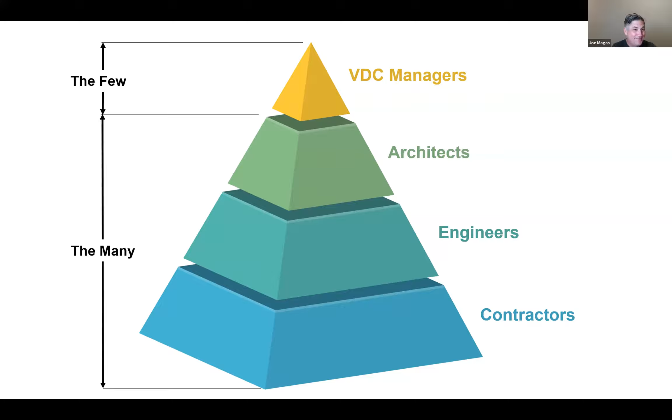And the problem with this pyramid, that model checking is only serving the needs of the few, is that if you reverse the pyramid, and I really want your thoughts on this, Jason, what we have is concentrated risk hinging on a few people, the VDC managers. And yet the rewards to everyone else are sort of unrealized. What's your thoughts on this, Jason?

Yeah, I think with such a small group of people on the project traditionally running the model checking, that's a lot of risk, a lot of work on a smaller group of people. And meanwhile, there's designers, architects, engineers, and of course all the different contractors that really have a stake in it and should bear some of that risk. And so they too can be looking over their models, their designs, their constructability. So that's the shift that we're seeing. Right.

We want the risk to the few to be the rewards of the many, and that trend is happening in the industry. For example, I had a discussion the other day with a mechanical engineer. Now he works in a facility management or project management role in a municipality, but this sums up what people feel: I don't see the value of a 3D model. I just use PDF. So that's what he told me initially.

So that sounds kind of negative. He says, except I think a 3D of the mechanical room would be helpful. So while this engineer was trying to tell me he didn't see the need for model review, he actually was confirming my basic premise. He doesn't need to review the whole model, but to review the part that affects him is beneficial.

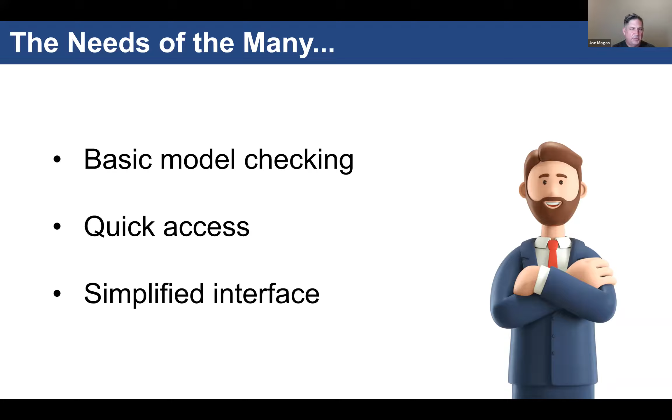So when we drill down, when we go to how does Solibri serve the needs of the many? Well, what do the many need? That individual I talked about, that engineer, he wants basic model checking, quick access, a simplified interface. That engineer at the municipality wants to do a basic checkup. You know, you go to the doctor and he taps on your knee and takes a few vitals, but it's a fairly quick checkup, right? There's no need for surgery at this point. It doesn't go beyond, it might take just 15 minutes, but it's very critical to get some of those basic things checked. And that's the positioning of Solibri Cloud—it's like this basic checkup.

That's a great analogy. I really like this one because everyone should go in for a basic checkup, and there are certain things you can do to just get a quick health check. That's exactly what the Solibri Cloud environment is for - keep it simple, keep it quick, be able to go in and do a health check on your models. It's a great solution for these basic checkups.

And we're checking basically for three things: clash, clearance, and data. Those are the most common things even that are used.

So let's talk a little bit about how the advantage of the cloud really is different. We're talking about Solibri in the cloud as being an intuitive interface, simplified workflow. One of the real nice benefits is the ability to upload not just IFC files, but native Revit files. We can just take a Revit file and upload it straight from a desktop or another location, and it goes right in seamlessly.

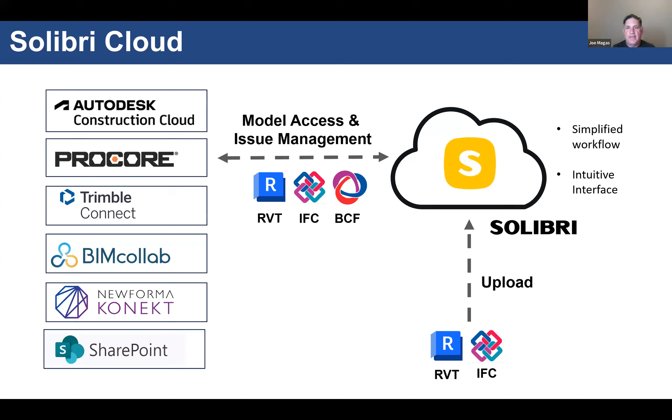Now let's just quickly take a look at the cloud version of Solibri. We're just gonna flip over here. So I just logged in - this is in Google Chrome. How nice is that? And I just logged in here to the authenticated environment.

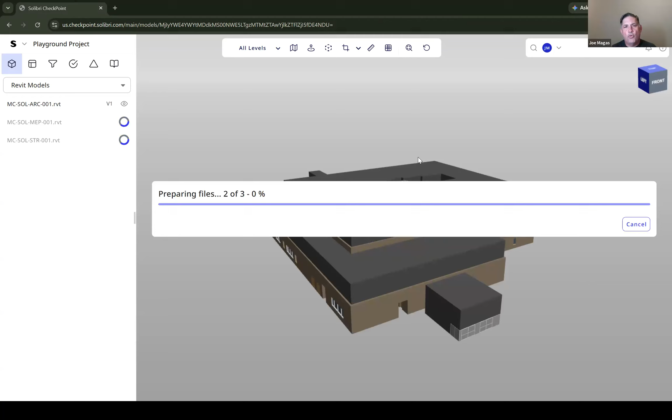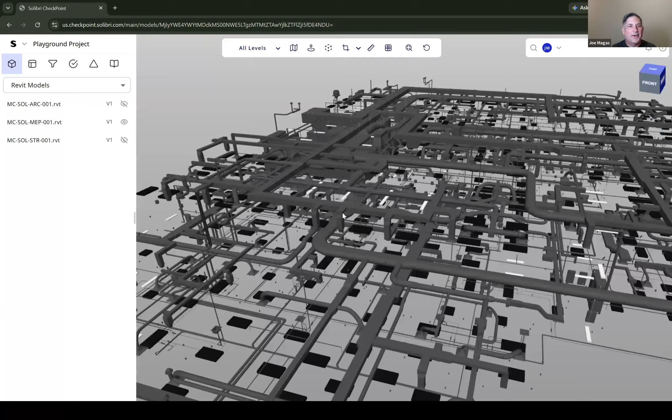We'll just open a sample project just to show there can be multi-disciplines in here. I'll open this playground project. Of course, loading these models is so quick compared to even starting Revit up - I don't even think Revit could start in the time that we were able to open this whole project, right? So in this project, we have an architectural model, we have an MEP, and we have a structure. And of course, very easy to turn things on and off and to query around.

We won't spend a lot of time looking at that. So if we want to just see our structural, let's say we just want to see our structural and our mechanical. So there we go - so nice and fast.

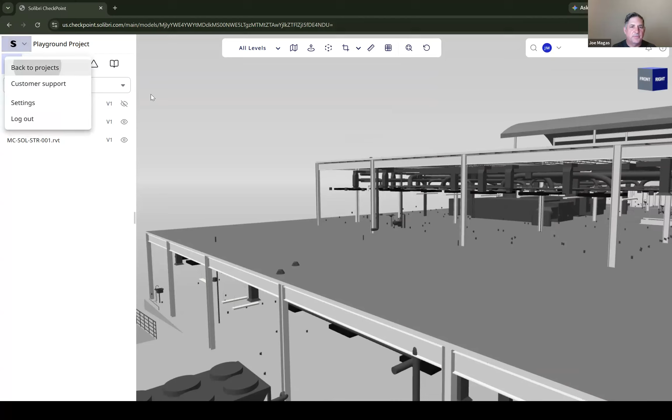We're going to go back to our projects and open another project, a very simple project. Now in this project, just to show how easy it is to navigate to do some model checking, we have 7 buttons across the top. This makes this interface so easy.

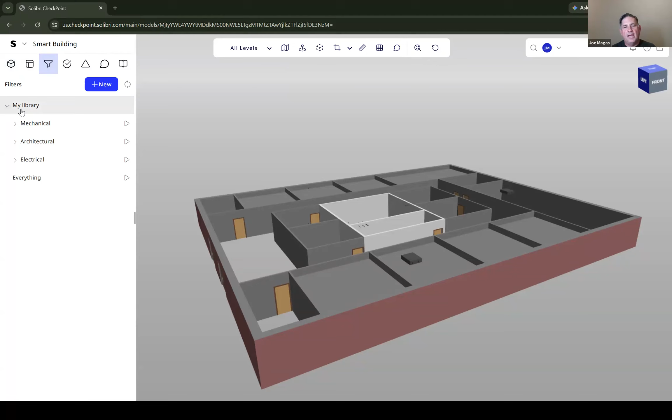We won't go into a lot of depth, but right off the bat we'll go right into filters. Of course, we can access data, and we can access the model geometry. So we'll go to filters. Filters is a way of breaking up a project, so anyone can do this. I'm just going to click on this filter - say I want to see on architecture, I want to see all my doors. There's my doors. I want to see all my walls.

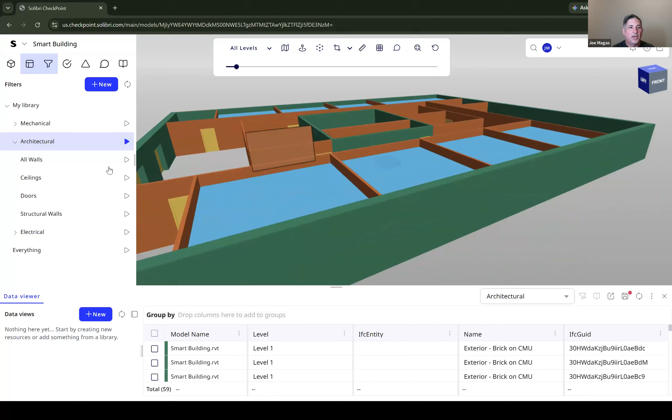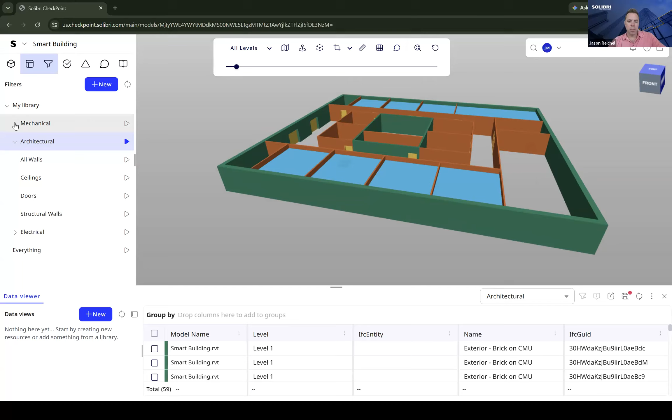Or if I click on this architectural category, how nice is that? It kind of color codes everything based on all of the filters below it. And what's nice there is as you're doing that, the data viewer at the bottom is updating along with you. So if you're filtered right now, you can even see the color coding down there in the data viewer, and you can see the green in the table. So it is reporting to you in the data viewer what you're seeing graphically.

And of course, that data viewer can be modified to show whatever properties that you want. So it's just nice, kind of looks like a spreadsheet, and it just shows you whatever information that you want to see. The other great thing I love is just a couple things.

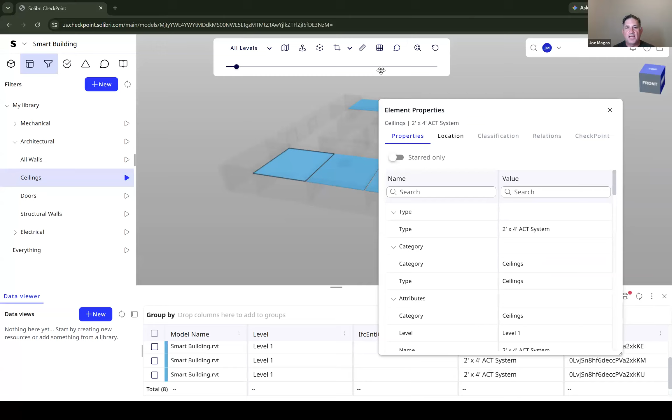You right click on something, it's like a quick clash - I mean, we gotta brand this expression, I want to do a quick clash. So it'll check if that object has any clashes with anything. Or, as you said, we click on element properties and we get this dialog box, which is similar to that, but we can see all of the Revit properties on this. Or if it was IFC, we'd see those properties as well. But you can see that those familiar with Revit, this is exactly what the Revit data looks like.

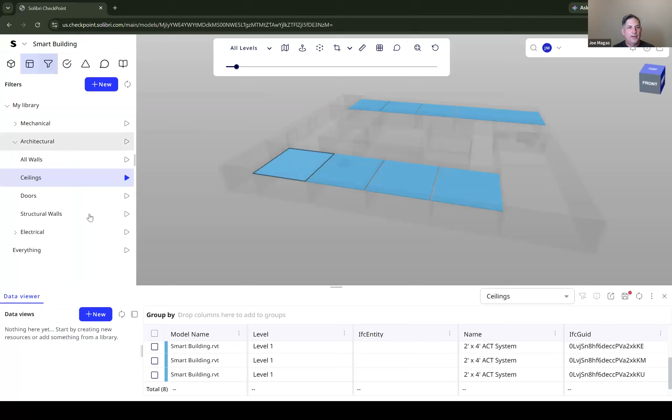So it's fantastically easy. Once we filter our project down, we can make some rules to check it. For example, once we filter for our pipes and our structural walls, we say okay, I want to see my pipes. Well, there we go, I have 6 pipes. And if I want to see my structural walls, well, those are my structural walls. Now I want to say, tell me if a pipe goes through a structural wall. It's really just that easy to click on rules here.

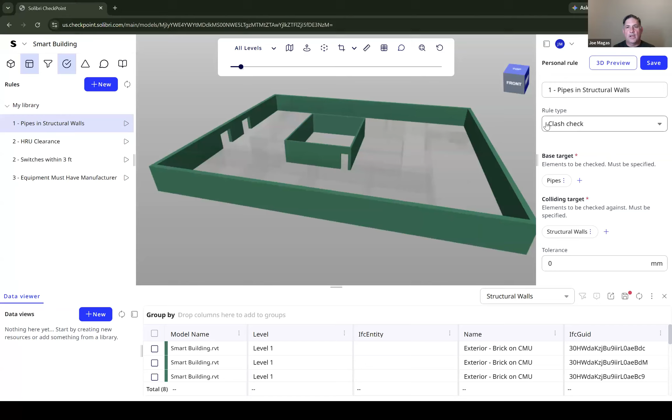I'll double click on there, and just to show you a bit of the interface, we just say I'm doing a clash between pipes and structural walls. That's the rule type. As I run it, I find that 3 of these pipes passed and 3 of them failed. 3 of those pipes went through structural walls and 3 did not. So that's very quick, and that was just one rule type, clash.

This is where Solibri is a cut above most solutions, because something that clashes or doesn't clash doesn't mean it's not a problem. Clearance is another issue, so Solibri Cloud has the option of checking for clearance. We have some units here, some HRU units, and instead of a clash, I'm just going to check is there a free space for maintenance, for safety, for constructability? Is there enough free space around this equipment? This is super powerful.

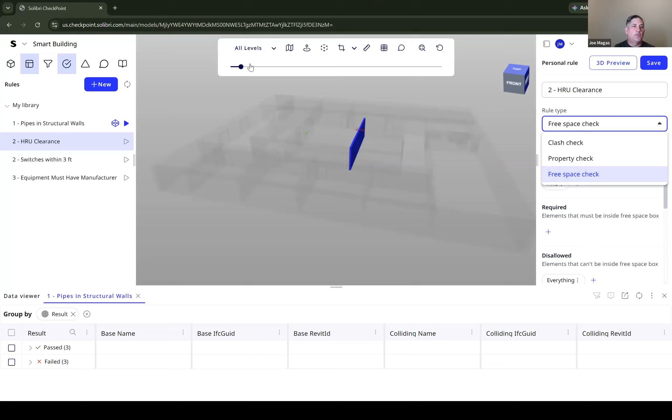We'll just run that. That's basically what I'm doing, running free space checks, and then I define the box. We'll just double click there, and what I find is we have 2 of these units. One of them, the green, it's happy. The one in red, there's not enough clearance here for whatever reason, safety, constructability, or maintenance. So now we need to do something about that. You can very easily see one passed and one failed.

This is a really powerful one, because what we see a lot of companies still doing is they build these clearance zones into the Revit families, and then they're running a clash check against that. So it's a lot of extra modeling, a lot of extra stuff inside your model, and it can give you a lot of false positives.

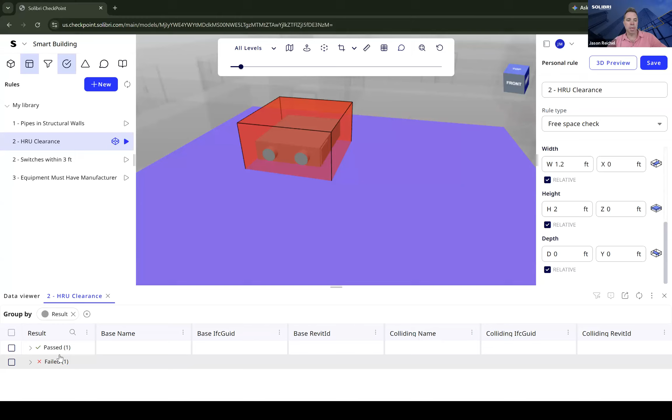So Solibri, the way we handle it in both the cloud and the desktop, is we superimpose that clearance zone and then just check against that. There's no extra modeling needed. Yeah, that's very, very true, I have heard that as well.

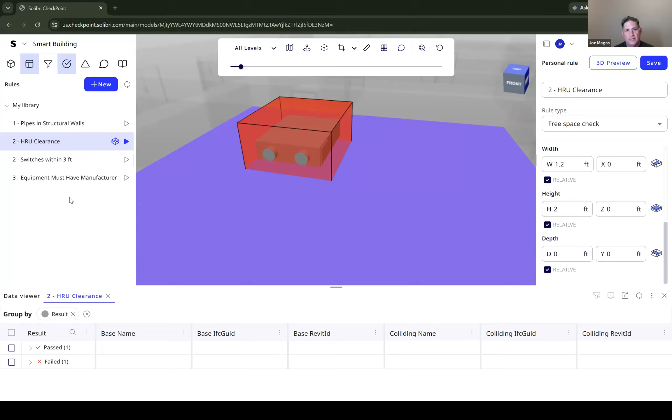So then the third check -- these two are very good, the clash and I call it clearance, Solibri calls it free space, we're all getting along though -- the third is checking for data. If we take a look at this rule and I double click here, basically I'm just saying I want to make sure that all my equipment has a manufacturer in it.

Now of course you could pull a schedule of this in Revit, and that would be another way to do this, but not everyone has Revit, right? Not everyone opening these models, and that can be slow. Whereas we can check the data very, very rigorously inside of Solibri Cloud.

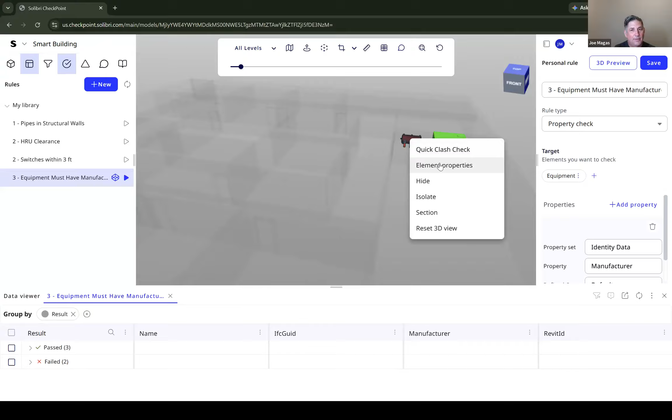So here we go, we have these green ones, they have the manufacturer on them. This fellow over here, bit of a problem, because it's under identity data, but it is missing that field in here. And again, how else would you notice you're missing it without a schedule, without some kind of mechanism like this? In fact, I'm having trouble even finding it -- I'll just go look here, there we go, manufacturer. There we go, nice search, and we can see that there's no value under manufacturer.

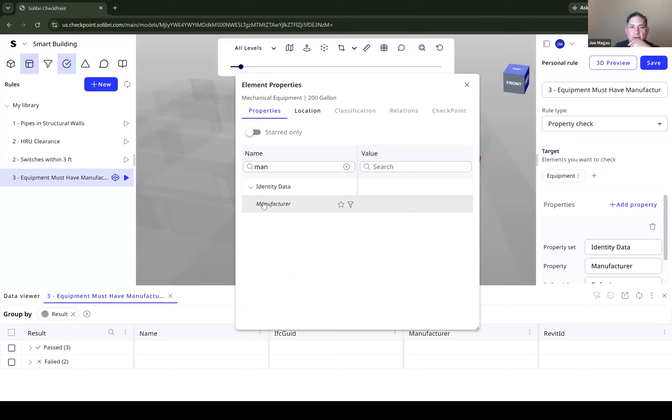So the premise of Solibri Cloud is just very quick. It's that quick health checkup to say, how are things looking? Do we have enough clearance? How's the data? Any clashes I need to be aware of?

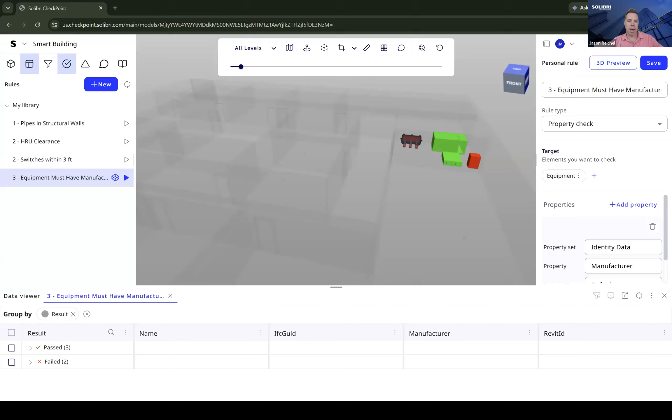So Joe, I think on this example right here, just another use case: if you had equipment manufacturers and a specific list of those that you wanted to use on a project, you can just copy and paste that list directly into this rule that you have set up. So if you had a list of 10 manufacturers, you could choose the operator that says 'any of,' right there, and then within that value box, you can paste a CSV list. So if you've got a list of 10 manufacturers, it'll check the whole model to see if the manufacturer matches one of those. Super easy to set up.

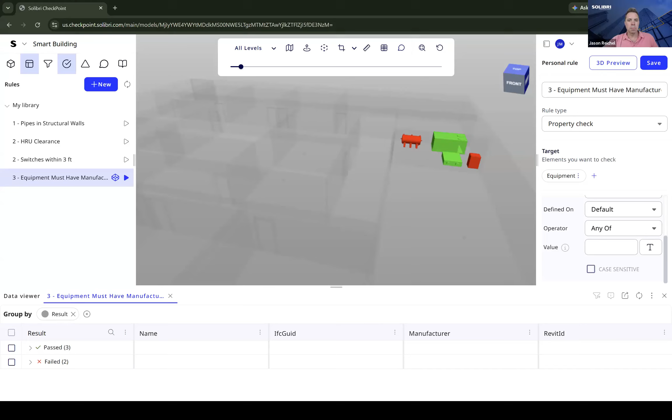This is for the needs of the many. Now, is it for the needs of the few? Possibly, but it for sure serves the needs of the many.

So back to our presentation. What are the needs of the few? What do VDC managers need? Well, they need intensive model checking. Solibri does something - Solibri desktop, when we talk about deep analysis, Solibri understands the what and the where.

When we talk about the desktop version, it can determine if something is missing from a certain space. Revit, for example, can determine if there's a fire alarm in a room, and display that in a schedule. But I don't think in Revit it'll tell you if it's missing. Nobody can tell you if it's missing, except Solibri Desktop has the ability to understand what should be there and where it should be. And if there's a mismatch, it really points these things that aren't obvious out.

It offers flexible classifications as a whole. It's like filtering 2.0, but it takes where the cloud version is and goes a little further.

Again, on our analogy, this would be the difference between that checkup and now doing an X-ray, where we're going beyond clash clearance data. We're checking for things missing. We're checking for accessibility - is there enough space? Are we able to navigate around fire safety building code issues?

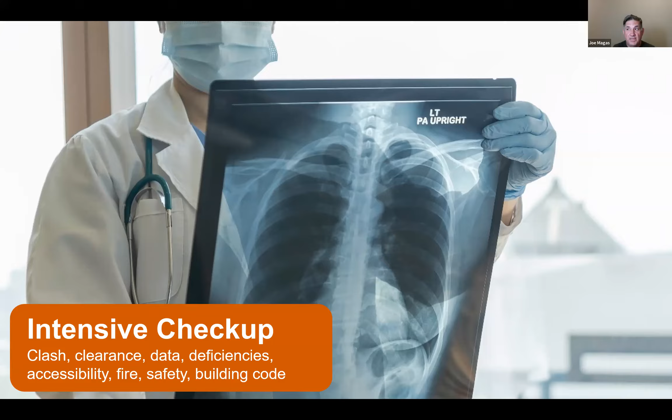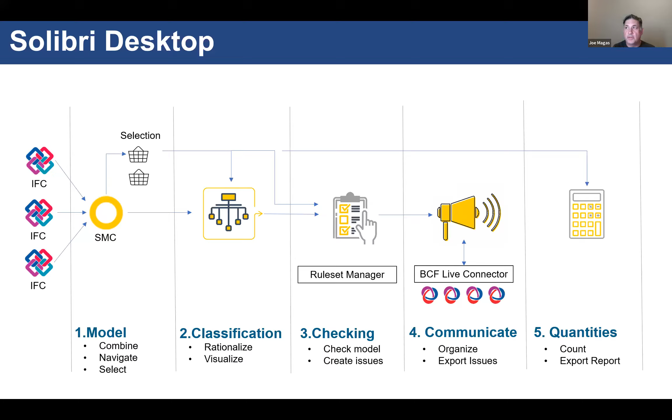So we're not going to go through the whole workflow - it's very similar, Solibri Cloud to Solibri desktop. There's just more buttons and a few more places with more nuance, and you get yourself into a room where you're dealing with a rule set manager. That's a different kind of place. Classifications are like filters, but they're deeper - there's much more you can do with them. But in essence, it is a similar workflow, it just has more nuance and more complexity.

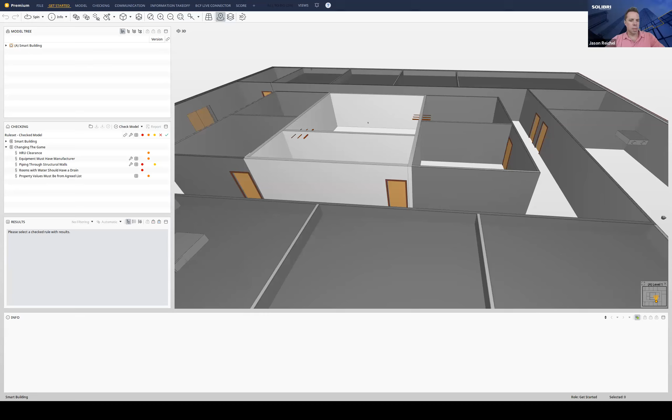When we flip over to Solibri desktop, we know it's the same model imported - this would have had to have been imported. So this is the desktop version, and again, we opened the same model there. In fact, I thought I wanted to open the clinic building, but we'll get to that in a second. So this is the same model, it was loaded with IFC, and what we see is just more nuance in the interface.

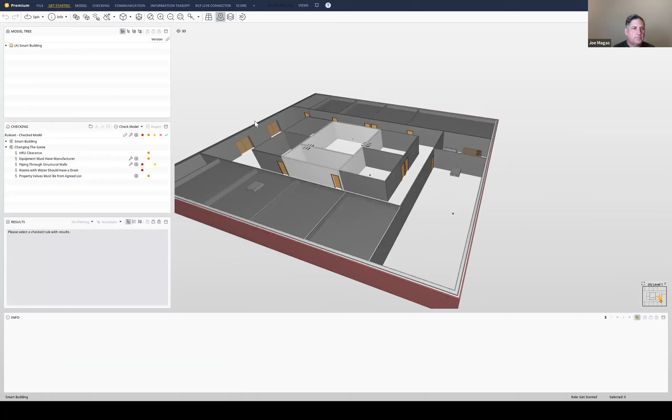Now when we go to run this check here, one of the huge advantages of Solibri desktop is the rule set manager. For those of you that are BIM experts, this is very similar to the family editor inside of Revit - you go to a separate room, you have templates set up and you create rules, or in Revit, you create families that are highly customized to what you need, down to the very letter of the law.

So here's all the templates that you have - 160 templates in Solibri Desktop, dealing with a comparison between values, distance between objects, are objects in a certain space, the distance between spaces. This is very thorough. But the truth is, this doesn't serve the needs of the many very easily - this serves the needs of the few very well.

So clicking on these rules or setting them up, it's number of components in space, for example. It's amazing what you can do with some of these rules. We click on here, and we'll just check our properties - we can say, okay, the number I want to make sure in this kind of room, this kind of space, we have these many things.

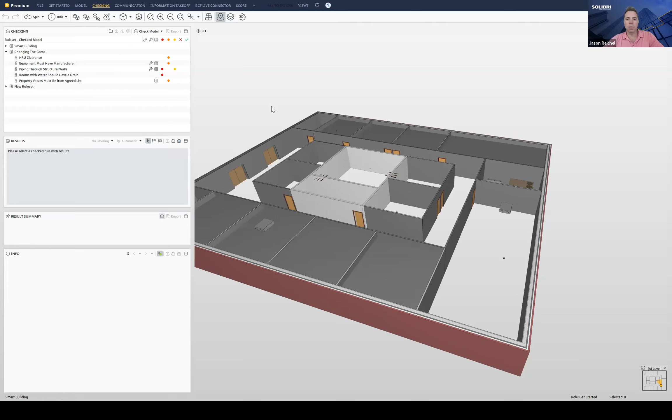So if we have a mechanical room, we want to make sure that there's a fire alarm, a smoke alarm, or a heat detector. Yeah. This one's really... so Solibri gets used a lot on healthcare projects, and in hospitals, you can imagine that each hospital room has to have certain things in them, and so that's a great rule right there to make sure that you're getting everything into the appropriate rooms. Yes.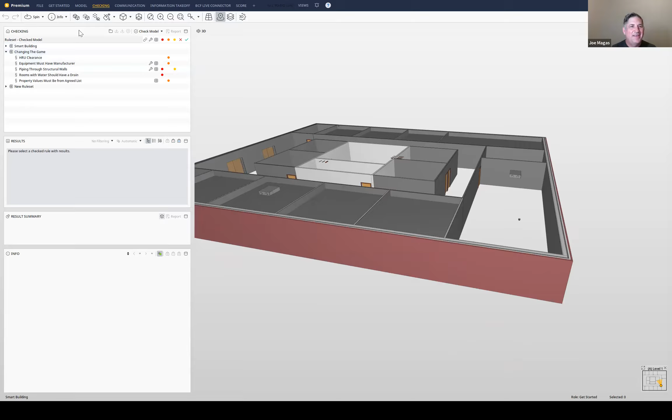It's the rule set manager and this spatial awareness that really sets Solibri Desktop apart. Now, when we go to check the model, we can get very similar kind of rules. There's just more nuance to it. For example, on my piping, I made similar rules, but what I added was a little tolerance here to say if they're smaller than a certain amount, forget about it. So I can build that right into our rule.

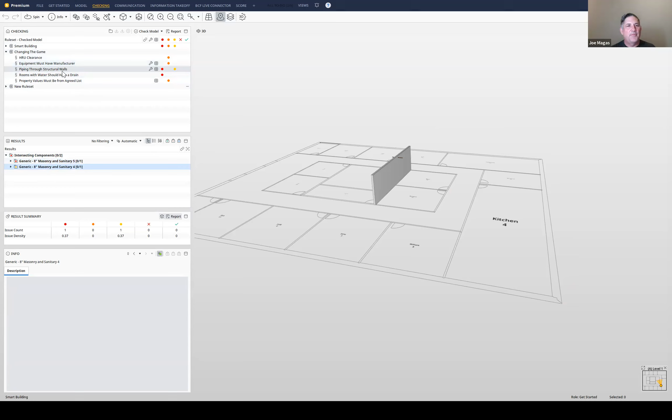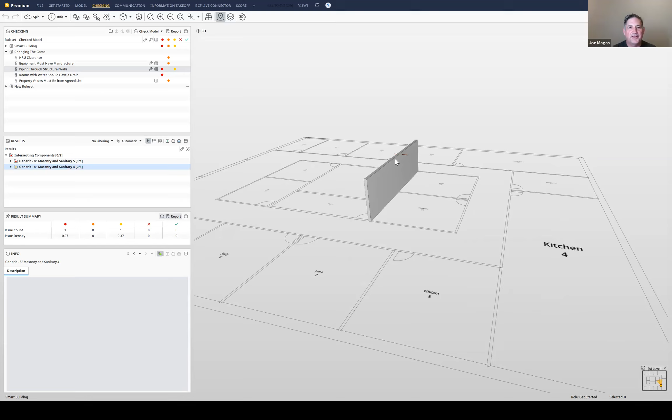So for example, here I can say I want a pipe, I want this. I can control the tolerance. I can control how severe. If it's this size, I want it to be reported as a severe thing. So just similar results, just more nuance.

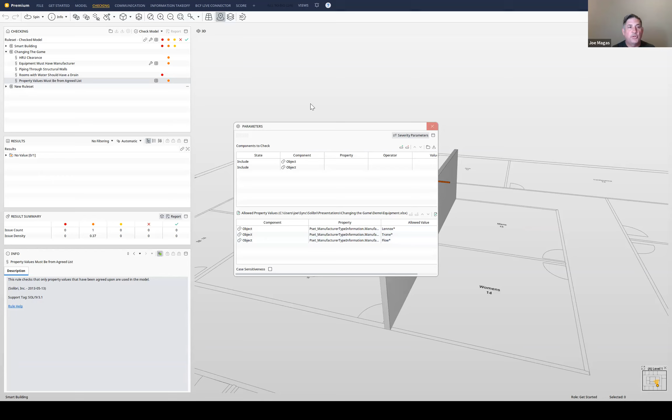When we talk about checking manufacturers' data, if we look at this rule here, again, we're checking for objects with data, and we were able to import that data right from an equipment Excel file. So similar, but we can link this and then refresh it right within Solibri Desktop. So if we were to check that model, which we did, we can find that these are the objects that don't have data or don't match the manufacturer data that was agreed to in those lists.

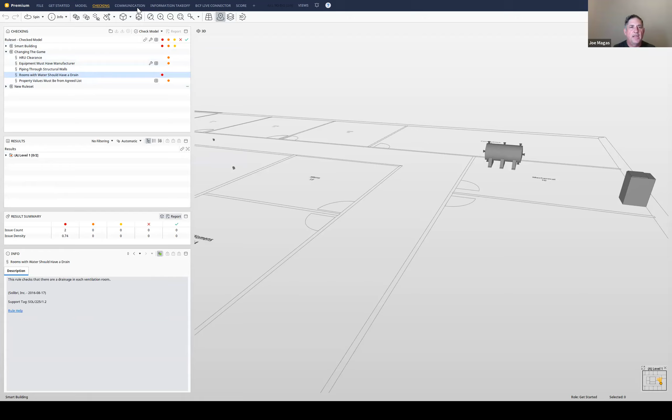So powerful stuff. But just as a simple demonstration of where Solibri Desktop differentiates itself, we can check for code items, things like that. We'll just take a look at rooms that have water should have drains. Now, we can understand spaces through different lenses. They're called classifications. They're just like filters, but a whole new level. So I can have Solibri understand these rooms have water in them, right? So there's the ones that have no water, and these ones that do.

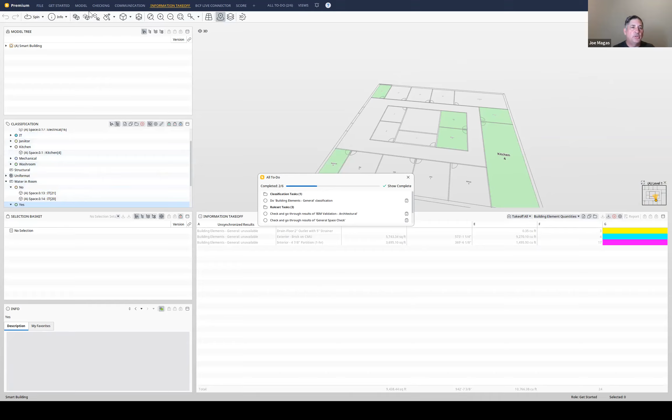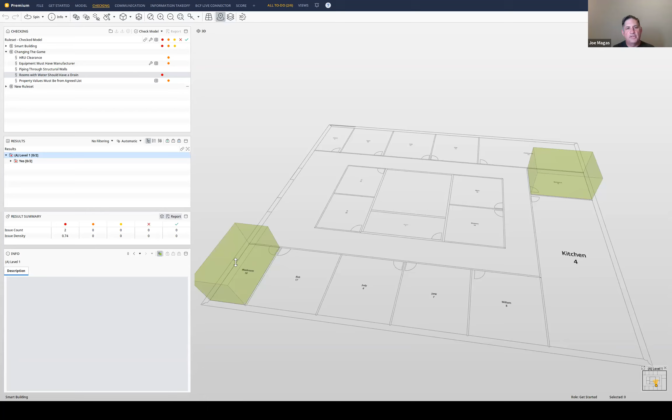Well, technically there'd be more that don't, but what we're able to do is a quick check and say what rooms that should have water have a drain. So we're finding out that these two rooms do not have a drain in them. Now, how are we able to check that in a Revit model? The drains are in a different project file. The rooms are over here. How are you going to check that? How are you going to check if you have enough light switches or enough clearance for things? So really powerful stuff within Solibri Desktop.

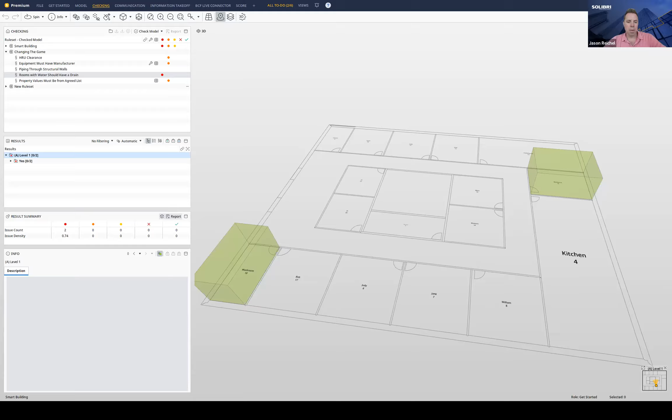Any thoughts, Jason? Yeah, this is a great use case. I think another one along similar lines is, if you've got electrical rooms, you probably don't want your water pipes running over those, in case of a catastrophe or a leak. Solibri can certainly check for things like that as well, to have that spatial awareness and check whether a pipe runs over an electrical room. So there's all kinds of those use cases possible in our desktop product. Yes. It's really designed for the needs of the few, though.